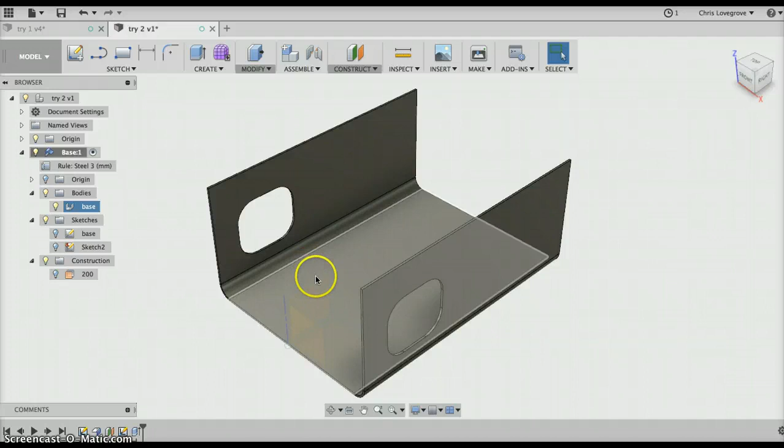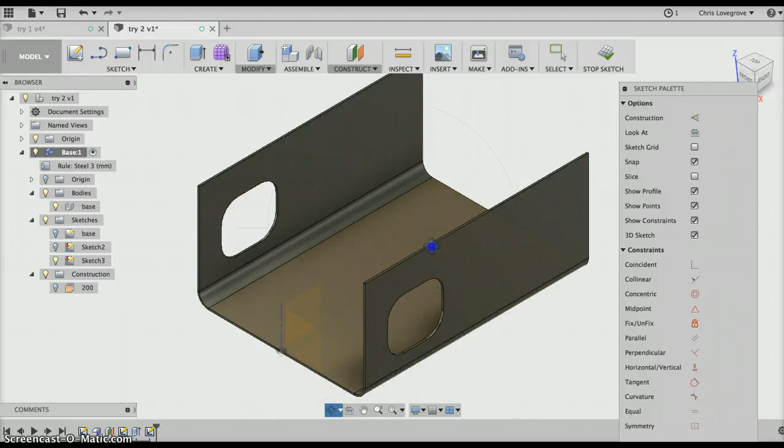Let's create a sketch. Now you can actually create a sketch on a planar face. So first let's select the planar face, which is here. See how it spins around? Sometimes when it spins around I don't actually watch it spin around and I sort of lose where it is. So quite often I'll go back to isometric and then I'll just use the orbit command, and I'm still on that plane and I'm going to sketch a line.

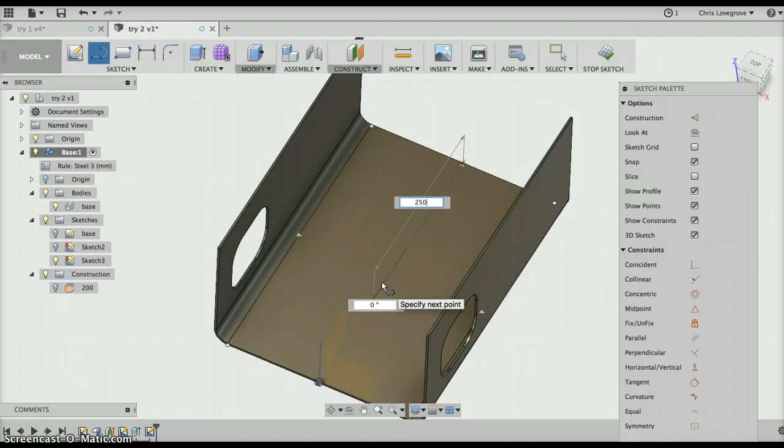And can you see that little triangle? If I go right to the end there and pick on that, that means a midpoint, and as I come down, can you see how I can put a distance in? Let's say 250. And if I hit the tab key, I'm at 0, so I'll just hit enter.

And then I'll pick on that, and I'll go X, because I want a center line. I think it did it as an X. Sometimes it's hard to see, hey? So just drag that text off to one side, pick on the line, and hit X. Yeah, now it is. Now it's dotted. So that's pretty good. And I'm going to draw a slot here.

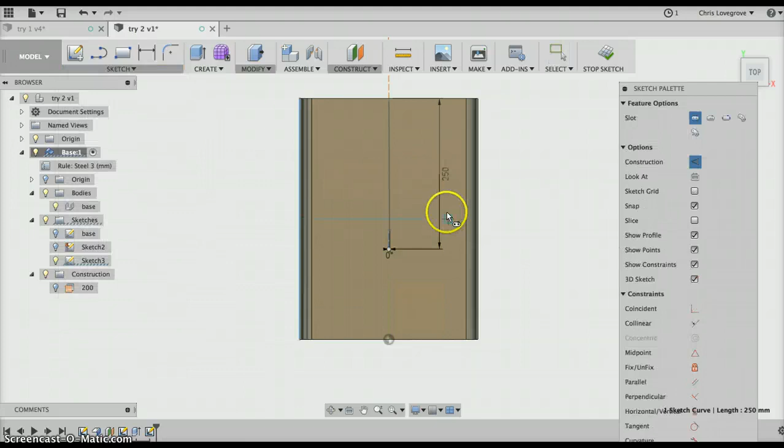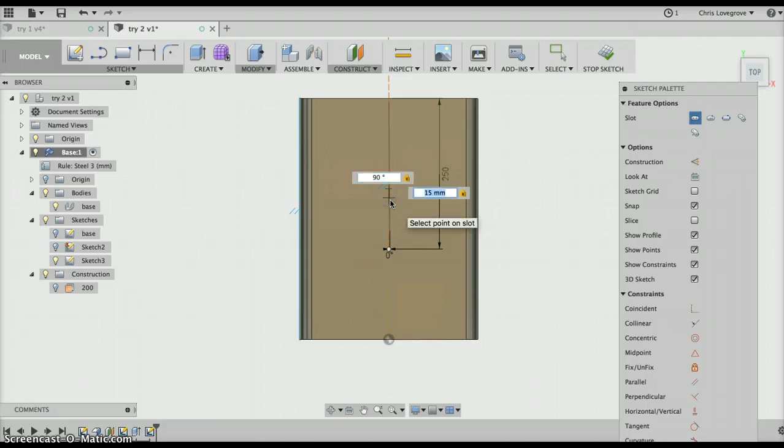So in Sketch, there's this command slot. And I'm going to do a center to center slot. And I'll pick on it anywhere, but I want to make sure I'm on that dotted center line. I pick, and then I need to put the next center. And I think our slot's going to be, let's make it 15 mil long. And 15, and hit tab, and then I need to pick, right, enter, cool, and then drag the mouse out.

And now it wants to know the diameter of the slot. So I'm going to type in, it's going to be a 6 mil slot. Yeah, we'll make it 8 mil, and then use a 6 mil bolt, and that'll be clearance. So we'll go 8 mil, and always change it. Go enter. Enter again. If I zoom in, you can see that slot.

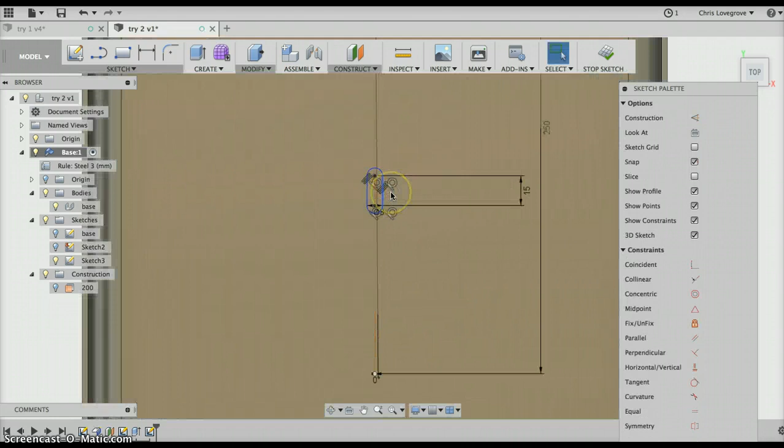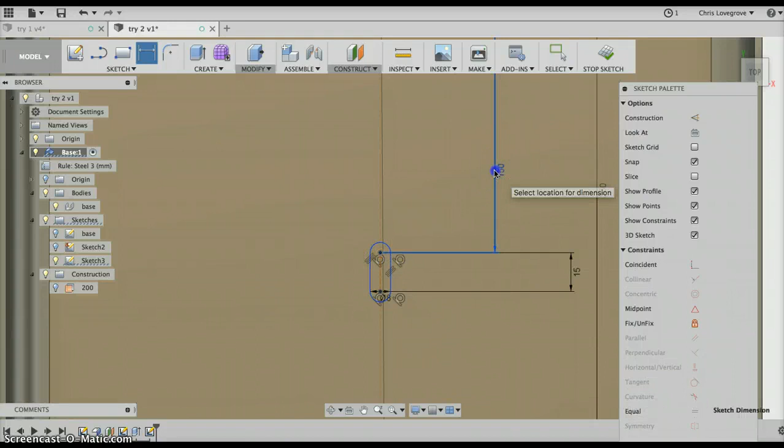See that? Now I know that the center of the slot to this front face here, the measurement was 156. So if I go dimension, pick on that very front face, and notice how I can't pick in between there, but I know it's 15 here. Let's just pick it there and put a measurement in. And we'll type in 156, and we can always go back and change that measurement. So that's looking pretty good, and we can stop that sketch and come around the top.

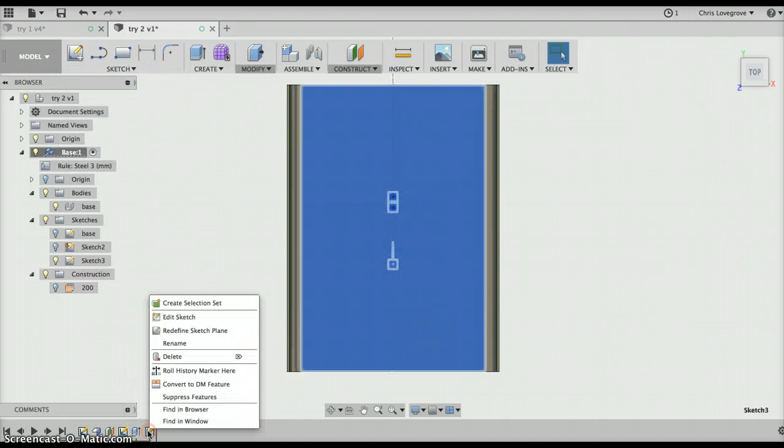Now there's 4 slots, so if I come over to sketch here, we can do a rectangular pattern in the sketch, but I actually need to be in the sketch to do that. So edit the sketch, and then sketch rectangular pattern. Let's zoom in a bit here, and here it says object select. If I pick on that, hold the shift down, pick on that, that, and that. Notice it's got 4 up here.

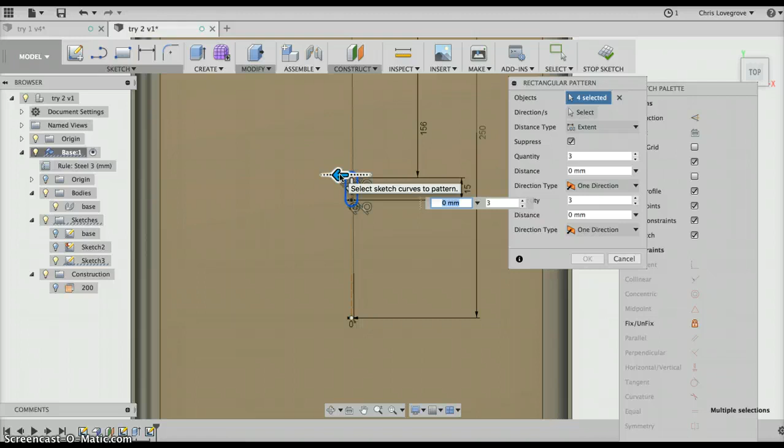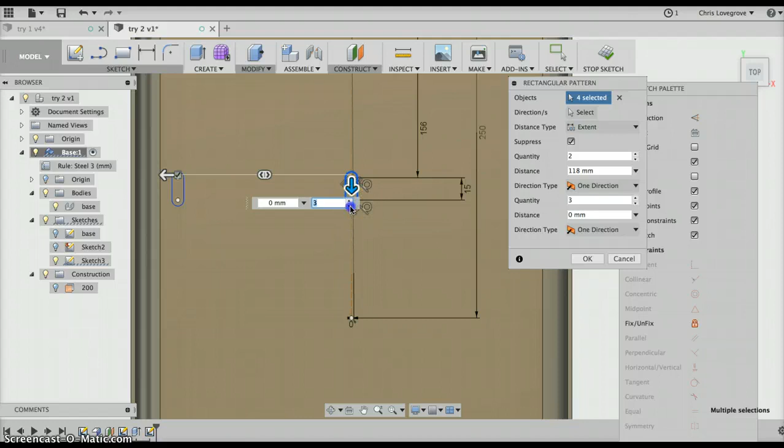Zoom out a bit. Now see how that blue arrow's that direction, see that first direction, and I don't want 3, I want 2, and I want the distance to be 118 mil. 118. Now direction 2, which is this direction, I want to have also 2, and I know that distance is 92. And we'll say OK.

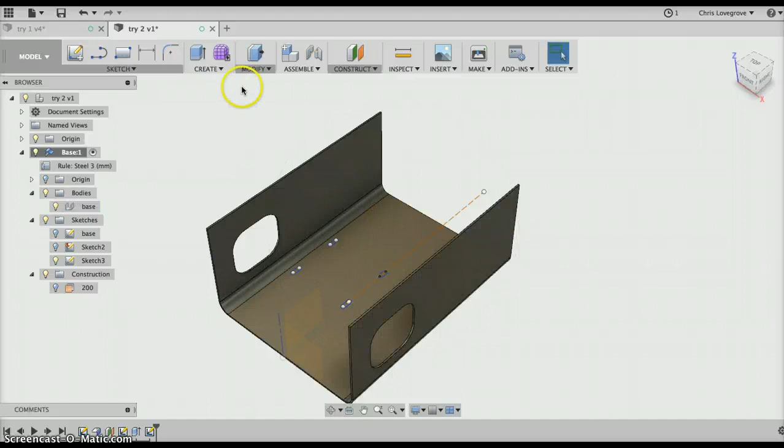So notice there now we've got those slots, and if we stop the sketch, go to isometric, just orbit it just a little bit, escape, and notice we're still in model and not in sheet metal. If I go modify, press pull, let's zoom in a bit, pick inside that one, hold the shift down, pick inside that one, with the shift still down, pick inside that one, shift still down, pick inside that one, and we're not going to do a new body. We're going to do a cut.

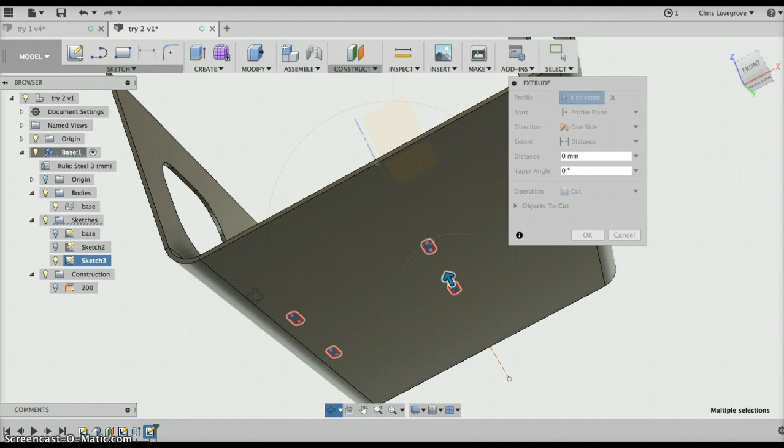And if I orbit this, the distance will be to object, to that object, and I always pick on extend to those faces, and it is a cut, say OK, back to isometric. There you'll see we've done our slot. Now you might have to measure up the electric motor and make sure those measurements that I've given you are correct, but I know that the engine slot is on the centre line.